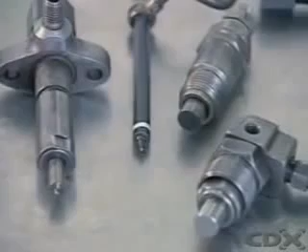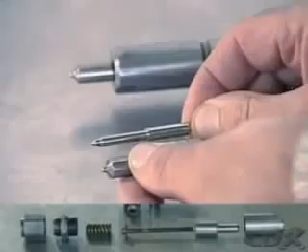Most diesel fuel injectors use the same basic design, made from heat-treated alloy steel. The actual shape will vary according to the application. The injector assembly has several main parts. The nozzle assembly is made up of a needle and body. A pressure spring and spindle hold the needle on the seat in the nozzle body.

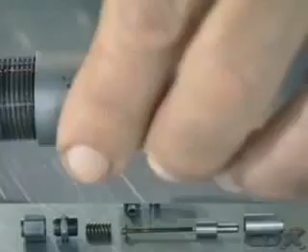A nozzle holder, sometimes called the injector body, may allow for mounting the injector on the engine and some method of adjusting the spring force applied to the needle valve. A cover keeps out dirt and water.

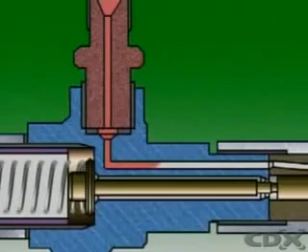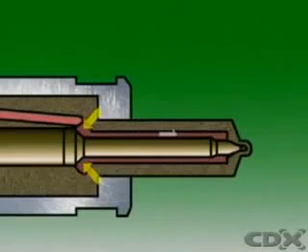The injection pump delivers fuel to the injector. The fuel passes through a drilling in the nozzle body to a chamber above where the needle valve seats in the nozzle assembly. As fuel pressure in the injector gallery rises, it acts on the tapered shoulder of the needle valve, increasing the pressure until it overcomes the force from the spring and lifts the needle valve from its seat. The highly pressurized fuel enters the engine at a high velocity in an atomized spray.

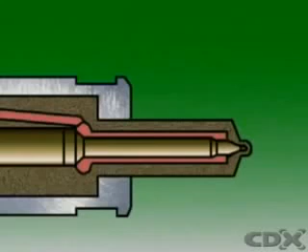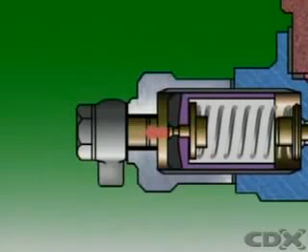As soon as delivery from the pump stops, pressure under the needle tapered shoulder drops, and the spring force pushes the needle down on the seat, cutting off the fuel supply to the engine. Some of the fuel is allowed to leak between the nozzle needle and the body to cool and lubricate the injector. This fuel is collected by the leak-off line and returned to the fuel tank for later use.

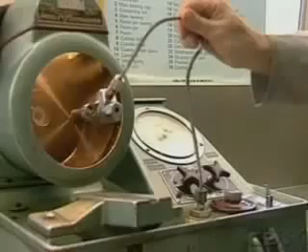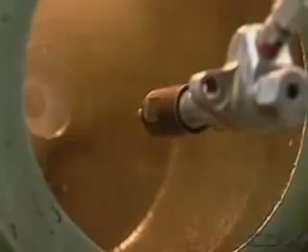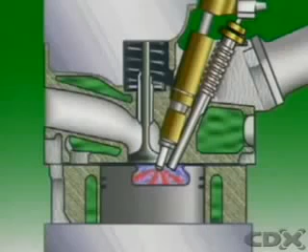There are two main types of injector nozzle, hole and pintle. Hole-type nozzles are commonly used in direct injection engines. They can be single-hole or multi-hole, and they operate at very high pressures, up to 200 atmospheres. They give a hard spray which is necessary to penetrate the highly compressed air. The fuel has a high velocity and good atomization, which is desirable in open combustion chamber engines.

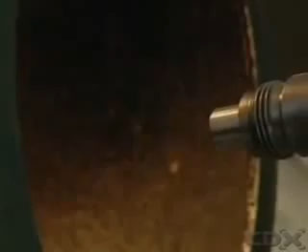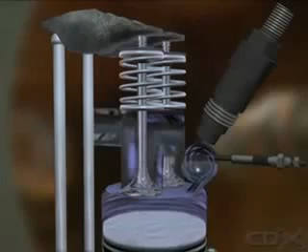In pintle-type nozzles, a pin, or pintle, protrudes through a spray hole. The shape of the pintle determines the shape of the spray and the atomization of the spray pattern. Pintle nozzles open at lower pressures than hole-type nozzles. They're used in indirect injection engines, where the fuel has a comparatively short distance to travel and the air is not as compressed as in the main chamber.